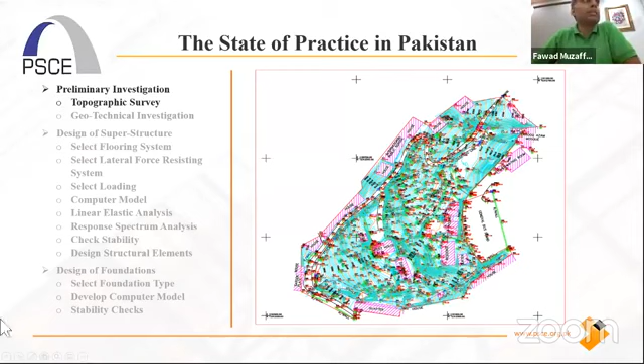So let me start with the state of practice in Pakistan. Typically once we start a project, we have the topographic survey done, so we have a fair bit of idea as to what the landscape looks like, followed by geotechnical investigation, which typically involves execution of a number of boreholes and the SPTs and different types of soil and water tests that are done on the soil.

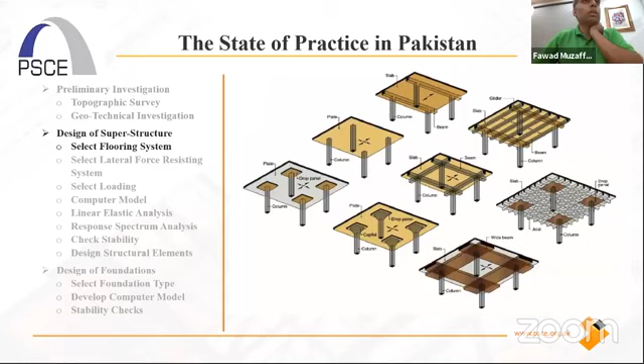After that, typically the structural engineer would select a flooring system, which is most often in urban areas a flat slab or a flat plate, or a beam slab system. Rarely, for larger spans, we go for waffle or other systems. After that, the structural engineer selects the lateral force resisting system.

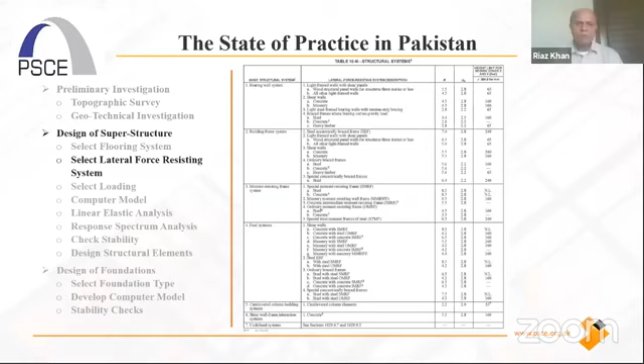Two of these lateral force resisting systems are very common. The first one is the dual system that everyone seems to use, and the second one is the special moment resisting frame system or the intermediate moment resisting frame systems. Very rarely do people use other systems, except maybe bearing wall systems in some cases, where you would like to have just the walls of the building support the lateral force that is to be imposed on the building.

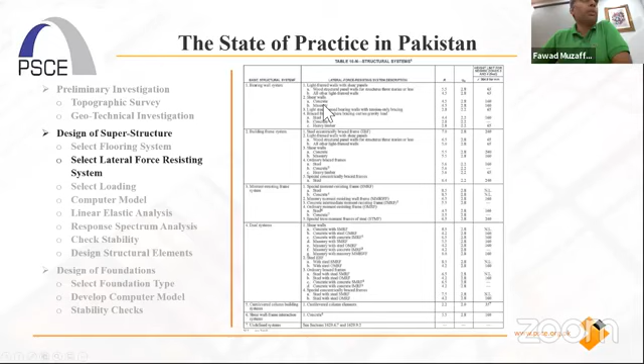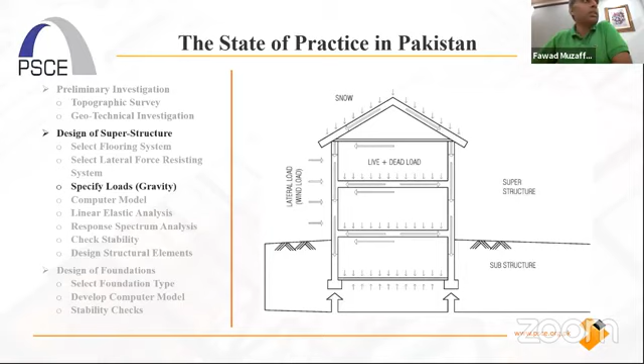After that, the structural engineer comes and selects the live and dead loads. People use UBC 97, some people use ASCE 7-16 because UBC 97 does not contain that list of different types of gravity loads that is there in ASCE 7-16 or ASCE 7-10 or earlier ASCE versions.

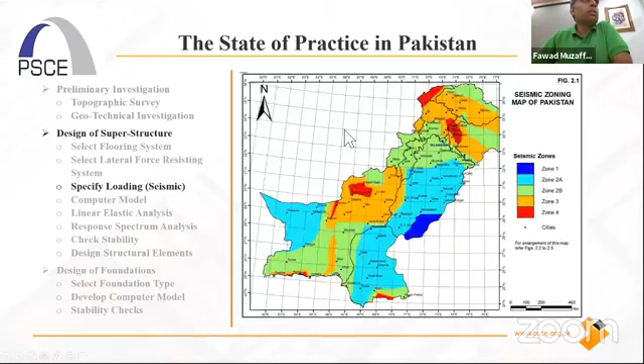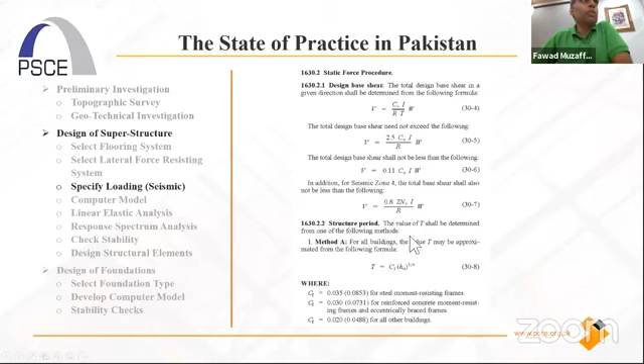After that, as far as the seismic loads are concerned, you just have this zonation done in the UBC 97, or what we call the Pakistan Building Code, and from this we pick a particular zone. Basically, what we are doing is assuming that a certain PGA is associated with each of these zones, and then we build the response spectrum accordingly. After that, the base shear is calculated from the standard formula: V equals CV over T, I over R, into W. These are the same coefficients that are used to construct the response spectrum, and at the end of the day, a response spectrum is constructed for the seismic load of the building.

The structural engineer also looks into the different types of irregularities that might be there, the vertical irregularity and the structural irregularities.

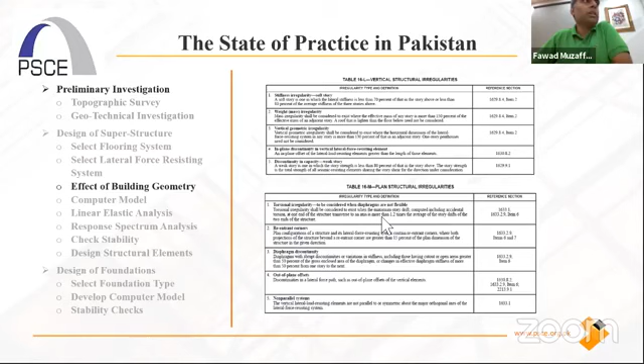Everyone knows how to use an ETABS model, right? Even people who have just graduated out of college know how to make an ETABS model. A linear elastic analysis is then carried out using the ETABS model.

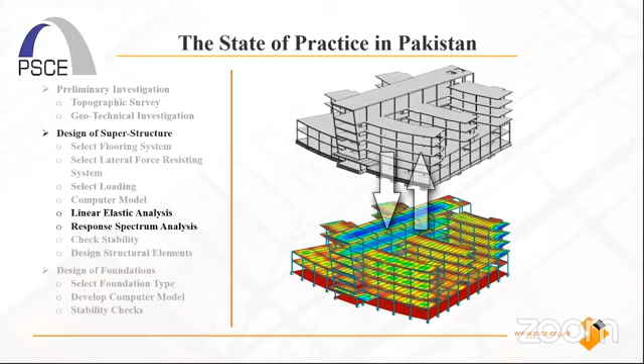Based on the force demands from the linear elastic structural analysis...

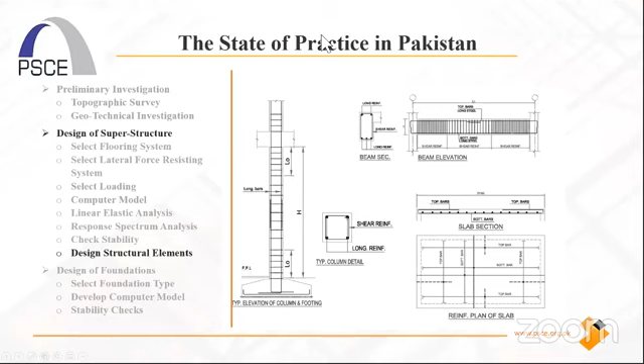So after, based on it, the structural engineer goes on and carries out the structural design. After that, the foundation of the structure is designed, and a separate computer model is typically built to design the foundation of the building.

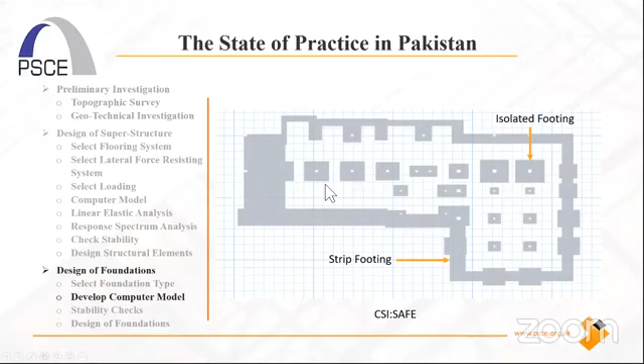Now this is very important, because a separate computer model, SAFE or another software, is constructed out of it. I'll come back to it later, but this is very important because what you are doing is constructing two different models which do not have deformation compatibility with each other.

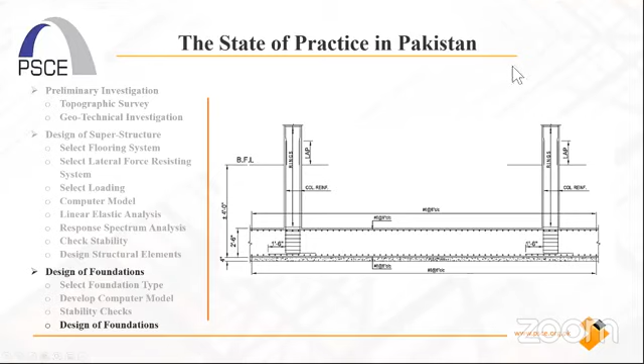And lastly, the foundations are designed based on the analysis of the model and the calculations of the structural engineer. So this is what everyone knows how to do in Pakistan. This is very typical. This is not rocket science. Everyone knows how to do it.

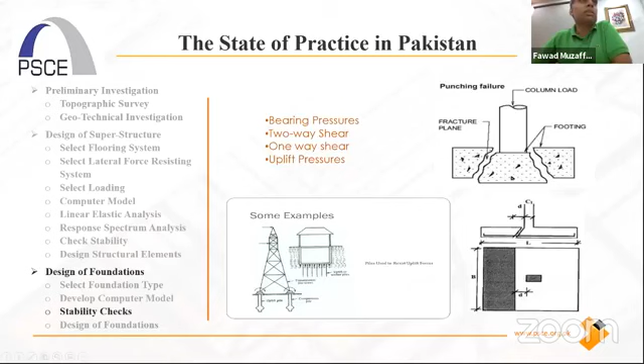But let me take you guys gradually towards whatever is happening internationally. So I'll start off with seismic hazard characterization - that response spectrum that everyone tends to use. What is the background of it? From where did it come from? And the answer is seismic hazard characterization. What do we mean by that? Well...

And every time there's an earthquake, all of those instruments record the acceleration ground history of the event. Now, over a passage of time, over decades, they have been able to accumulate a lot of these ground motion acceleration histories. So from these ground motion acceleration histories, they have empirically calibrated different ground motion parameters. So now what are the ground motion parameters?

The ground motion parameters can be the peak acceleration of the ground, which is called PGA - most commonly known by everyone. It can be PGD, peak ground displacement, or PGV, peak ground velocity. But by far, the most common ground motion parameter that interests everyone is the PGA, the peak ground acceleration.

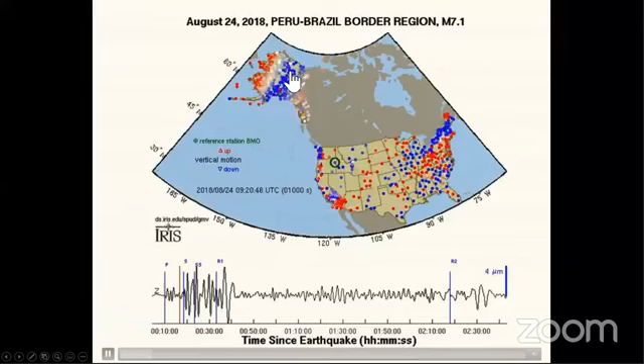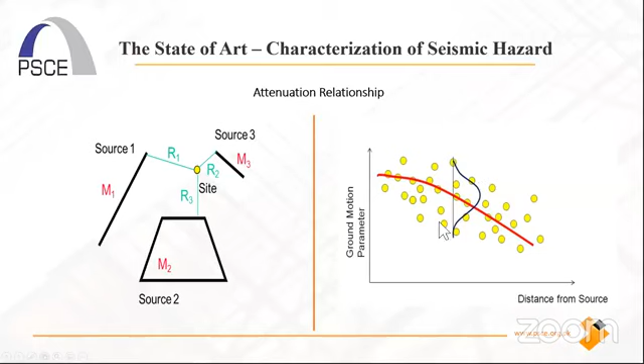Okay, so for each one of those events, each one of those stations where the ground motion history is recorded, they plotted all of the scatter, fitted a mean to it, and then calculated what the distribution around that mean for a certain distance is. And it came out to be a normal distribution.

Now there are two types of seismic hazard analysis.

The original seismic hazard analysis used in the 1960s and 70s was deterministic seismic hazard analysis. Basically, if you have a site, you can have multiple sources of hazard around it. Those sources can be point sources, like volcanoes, line sources, meaning faults, or area sources, where we do not have a well-defined source of the earthquake, but it's assumed to be spread around a certain area.

Remember those attenuation relationships gave you the ground motion parameter as a function of distance from the source. So if we have a site with source 1, source 2, and source 3 around it, we can determine the minimum distance from each source to the site, then plot those statistical means, the attenuation relationships, and get 3 curves for each of the sources.

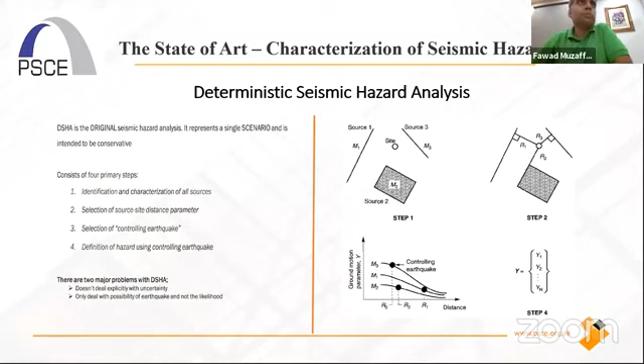Subsequently, they developed an approach called probabilistic seismic hazard analysis. This approach not only takes into account that an earthquake can happen anywhere within the source, and that the magnitude can be anywhere from 4 all the way up to 9 or maybe 10, but also that the intensity of ground motion at the site is not certain for a given magnitude and distance from the source, and furthermore, we do not know when the earthquake will occur. So probabilistic seismic hazard analysis takes into account all of these uncertainties, not just the worst case scenario.

As I told you before, there are different types of sources: point sources, line sources like faults, for example the Main Boundary Thrust in Pakistan, and area sources, where you have an area and you don't know exactly where the earthquake will occur, typically the case where fault lines are not well established. There are three types of sources that they discovered.

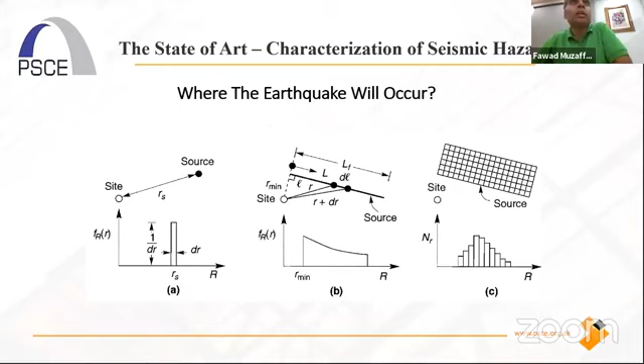I will not take you deeper into this because I don't think you guys will understand it. But basically, for a line source, it is equally likely that the earthquake will happen anywhere along the line, as you can see in figure B. And for an area source, they divided it into different grids and said it is equally likely that the earthquake will happen within one of those grids.

The next question was how big the earthquake will be. There are three types of laws that they used.

The slip dependent laws, which is basically applicable for sources that have a well-defined slip rate.

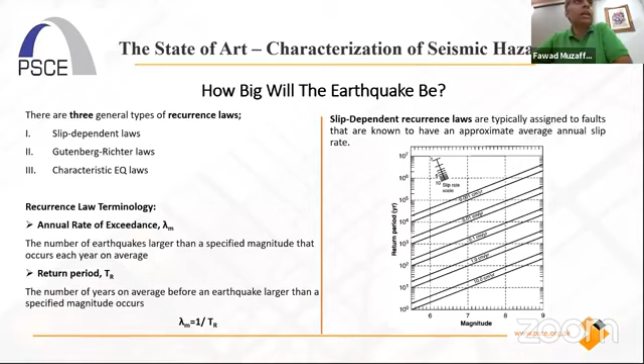The Gutenberg-Richter laws, which basically describe that the number of earthquakes occurring annually from a given source is a log linear function of magnitude.

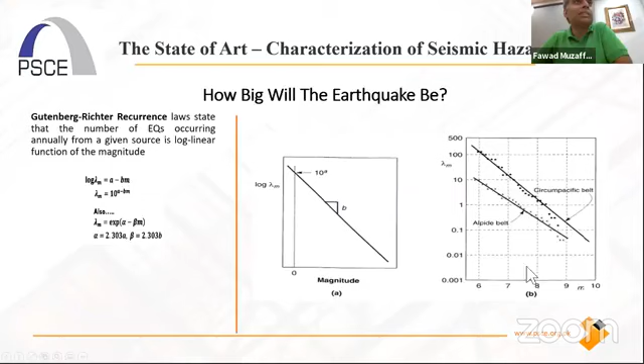And lastly, they realized that from a certain source, you cannot have earthquakes higher than a certain magnitude. This characteristic earthquake recurrence law is an adaptation of the previous Gutenberg-Richter recurrence law, with the taper off of the maximum line that you can see here, and this is typically taken from the geological data.

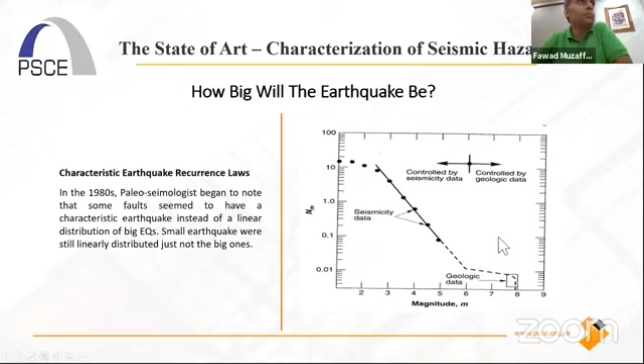And they did the temporal uncertainty by using the Poisson's model, which basically assumes that there is an equal likelihood of an earthquake happening within a certain magnitude, within a certain period of time, or for a certain unit time.

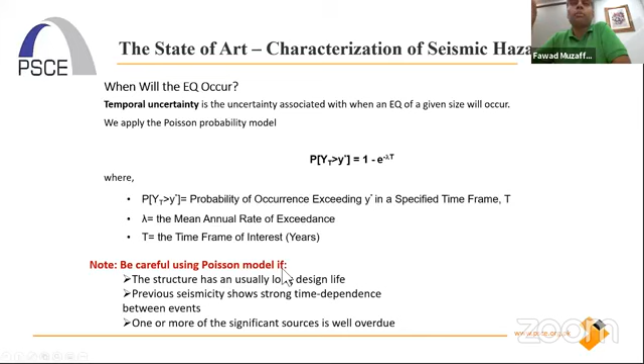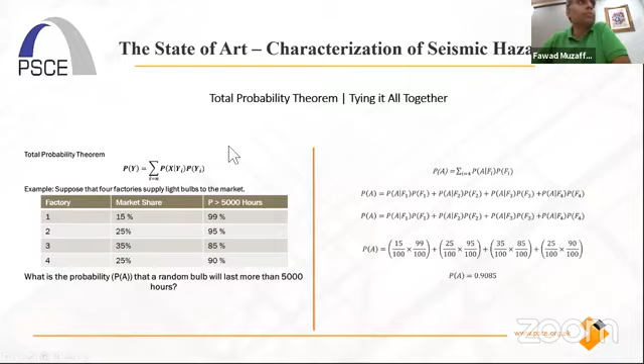Now, because all of those things were different probabilities, they stitched everything together using the total probability theorem, and came up with this big equation.

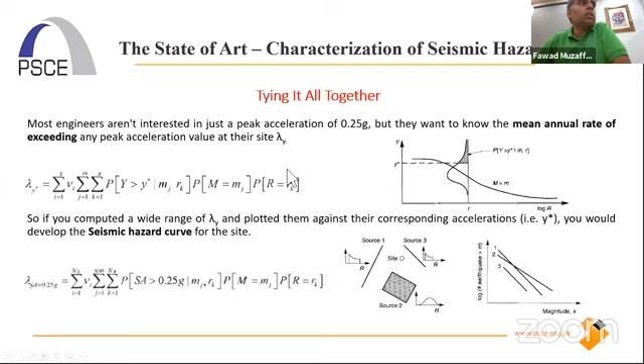So after doing all of the probabilistic stuff, and I won't take you deeper into it because I don't want to lose your attention, they developed a seismic hazard curve, the solid black curve that you see on the top there.

Basically what that curve gives you is the annual frequency of exceedance, or in other words, a relationship between the probability of a certain magnitude of earthquake happening per year with the PGA. So if the x-axis is the peak ground acceleration, the y-axis is the annual frequency of exceedance, right?

So annual frequency of exceedance is basically the mean number of expected earthquakes of a certain magnitude that we expect to happen in a particular year.

So from this seismic hazard curve, what they generated was the uniform hazard curve. What is the uniform hazard curve, and how did they do it? Basically...

What we are interested in is, for example, what is the uniform hazard curve for an event that we expect to happen every 50 years, for example, right? So we would have this horizontal line here, and from that horizontal line, we can have these different intercepts with the time period of the oscillators for the different ground motions.

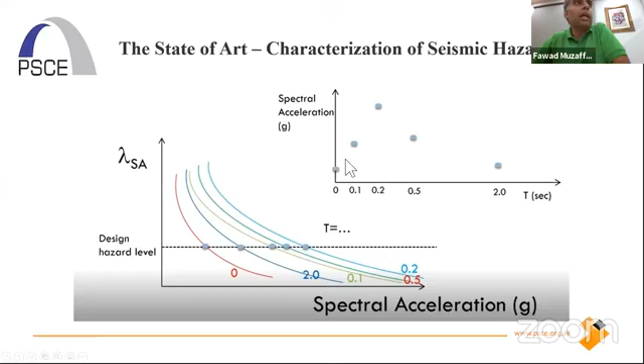And then from these intercepts, we can read the spectral acceleration and similarly plot those spectral accelerations as a function of the time period of the oscillators. And if we do that, we get something like this. Now this is too much for you guys, but I just wanted to give you a flavor.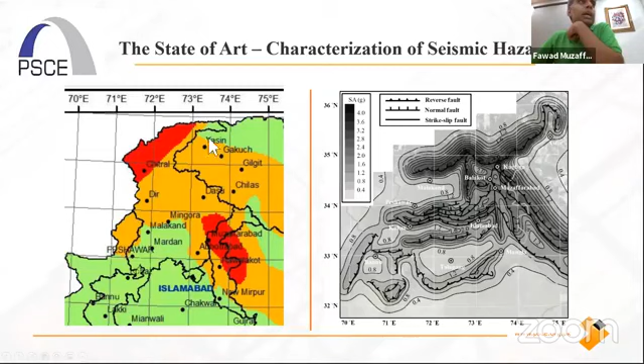Okay, so similarly, sometimes they draw these contours, other times they have these fancy colors on the left. This exercise has been done for the whole world, and you can download these maps from the Global Seismic Hazard Assessment Program website, and they have done it for different return periods.

What I mean is this map will change for different return periods. So this one is for, I think, 2,475 years, which is the MCER level for the UBC 97.

Just a quick overview of the tectonic setting of Pakistan. All of the faults going from northeast to southwest are strike slip faults, and in general, all of the faults perpendicular to it are reverse faults or thrust faults.

You can see that the fault on the left is basically the Chaman fault here. This is the Salt Range fault and the Kalabagh fault, and then you see the main boundary thrust arcing from southeast, like this. I don't know if you can see my cursor, but basically what I'm talking about is fault number 3, if you can see the screen also.

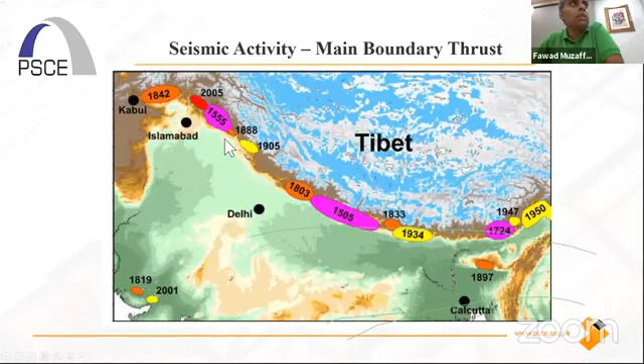So we have one in Kabul in 1842. The 2005 earthquake is also marked here. But the next big one should be northeast of Islamabad or northwest of Islamabad, and it's due.

So with all of this background, I'm sure most of you will be bored. There's a lot of science, a lot of seismology that has gone into it.

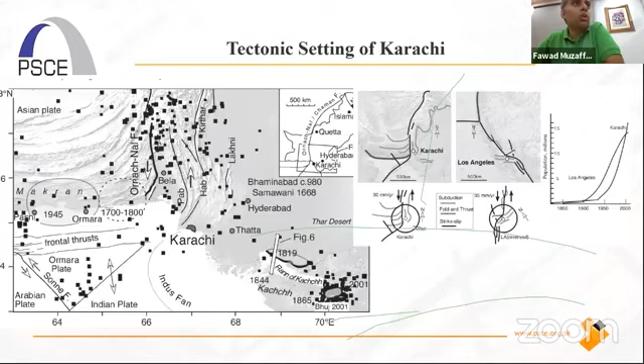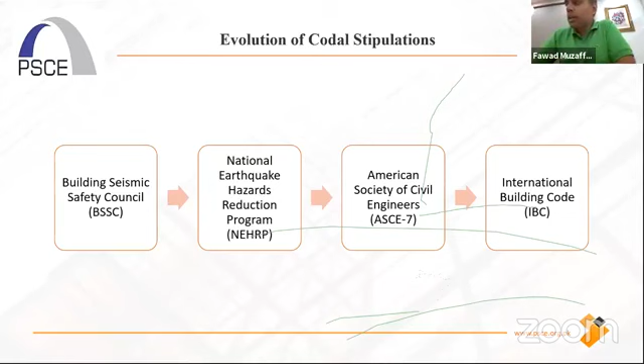What they have is a Building Seismic Safety Council, where a lot of experts meet and talk about important problems facing the construction industry. They identify the key problems and the research behind it and send it to NEHRP, the National Earthquake Hazards Reduction Program. NEHRP then further discusses those recommendations and the research, and then stipulates the Codal provisions. NEHRP then sends it to the American Society of Civil Engineers, which adopts those after review. After the provisions have been adopted in ASCE, they send it to the IBC, which then reviews and adopts it. This is basically the hierarchy of different Codal stipulations.

Now, if you open ASCE 7-16, you will see contour maps like the ones that I showed you a few slides back. Now you know where these contour maps come from, right? It comes from probabilistic seismic hazard analysis and all that probabilistic stuff. So the first thing an American engineer would do is locate his structure on the map and read values of SS and S1, which are spectral accelerations at 0.2 seconds and 1 second.

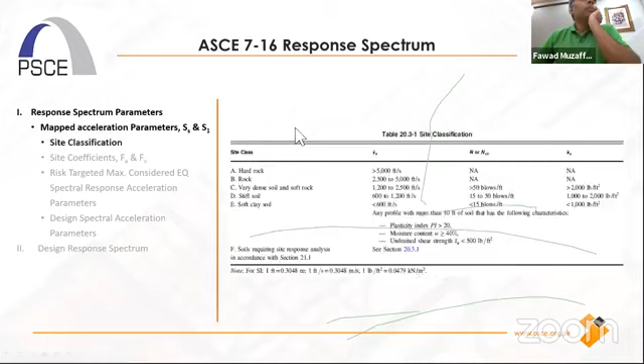After that, the engineer goes in and uses either the crosshole survey or the SPT blow counts to classify his soil at the site. This is similar to what we do in UBC 97, right? But then he adopts these FA and FV coefficients.

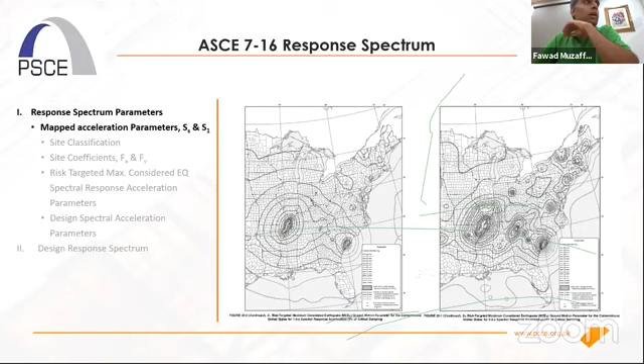Basically, what these coefficients are: the ground motions we discussed, the spectral accelerations that I showed you — let me take you back — the spectral accelerations mapped here in ASCE 7-16 are accelerations of the rock. Typically there's a lot of soil on top of the rock, and that soil can either amplify or de-amplify those accelerations. So FA and FV are basically coefficients that take into account those variations.

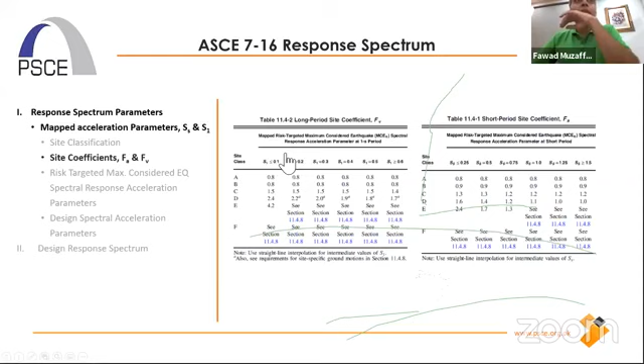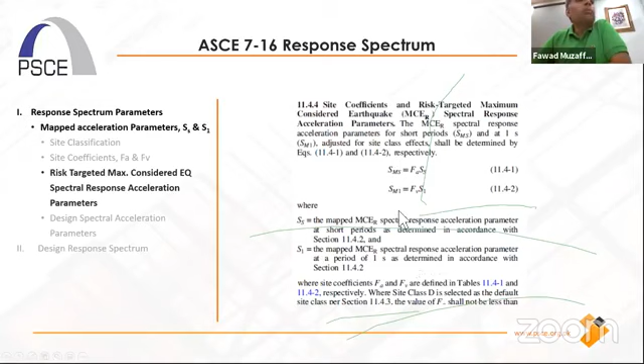Another way to put it, without getting into the simulation, is that the engineer then calculates SMS and SM1 by multiplying the FA and FV coefficients with the SS and S1 that are mapped in ASCE 7-16. From those SMS and SM1 values, the engineer calculates SD1 and SDS by simply scaling with a fudge factor of 2/3. This fudge factor doesn't have much science to it, because it's a fudge factor.

Because what they ended up with in ASCE 7-16 is that the ground motions were a lot higher compared to what they were using previously, and they didn't want to change all the buildings or outdate all of them. So they figured out that a factor of 2/3 should be sufficient to make it compatible with the previous codes, and that's where this fudge factor comes from.

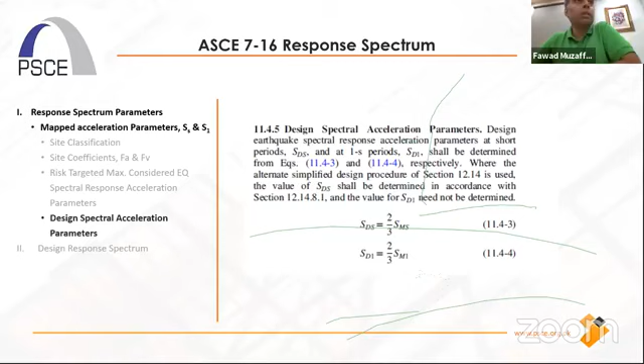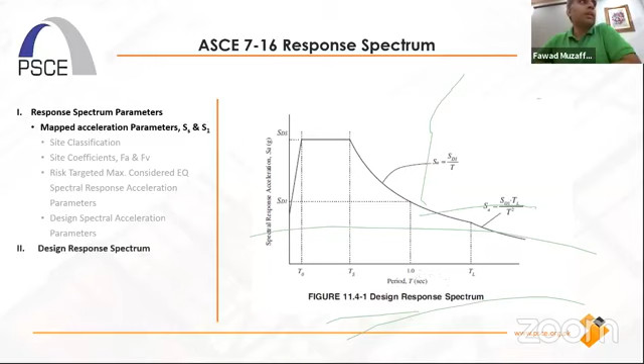After that, the engineer constructs the response spectrum. So the overall process is the same, right? But there are marked differences between ASCE 7-16 and UBC 97. First of all, the prescribed lateral force resisting systems have expanded a lot.

So in UBC 97, you would have only a few types of bearing wall systems, but in ASCE 7-16, you have a lot of them. Similarly is the case with building frame systems. You have a lot more of these building frame systems as compared to the systems in UBC 97. But something new is also included.

I mean, most of us are accustomed to using dual systems. And in dual systems, if you open up UBC 97, you would not be able to use a special. There's no prescription of value of R for special moment resisting frame, special shear wall with intermediate moment resisting frame. So if you open UBC 97, you don't have that system.

But here they have included the dual system with intermediate moment frames capable of resisting at least 25% of prescribed shear force, and they have coupled it up with special reinforced concrete shear walls, as you can see in paragraph E2. So there are a lot of new building frame systems.

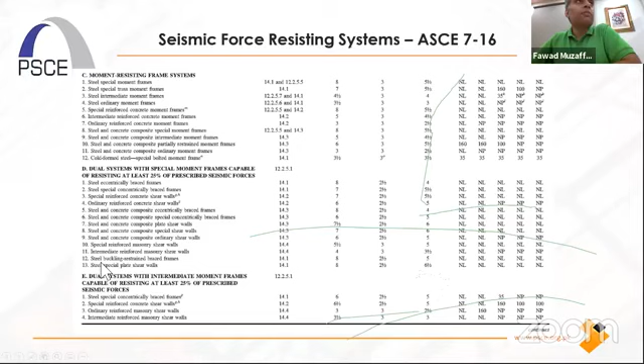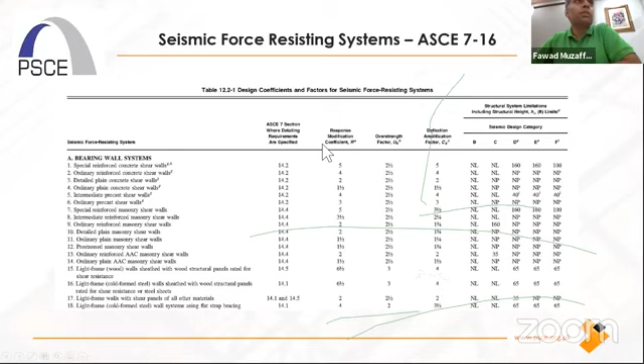Secondly, one other big difference that we have is this coefficient, deflection amplification factor CD. So in UBC 97, you are told that an overstrength factor or response modification coefficient R is given, and we are told that to convert an elastic deformation into an inelastic deformation when it comes to drift, we just have to multiply it with 0.7 R, and it's a fudge factor. But here they have included deflection amplification factor separately and response modification coefficient or overstrength factor R separately. So these two are now decoupled in the new codes.

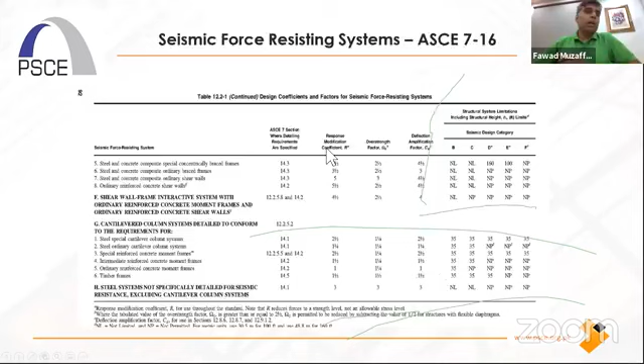One of the key differences, and the world has moved on: if you use UBC 97 to design a building, there is a 10% probability that your ground motion will be exceeded in the next 50 years. Now this is unacceptable by international standards, whereas in ASCE 7-16, even in the IBC code, now there's a 2%, they have ramped up the ground motions. So now there is a 2% probability that your ground motion will be exceeded in the next 50 years, which is a lot less as compared to 10% probability of exceedance.

Now, this has a lot of repercussions. All of the buildings that you're designing in Pakistan are basically obsolete as far as the new standards are concerned.

See, I was talking to you about how to calculate the maximum inelastic response displacement. On the left side, you see UBC specifies 0.7 R delta S. And to calculate delta S, UBC tells you that you should use the base shear that you use to calculate force effects. Correct me if I'm wrong, but this is what I understand from UBC 97. On the other hand, in ASCE 7-16, they give you this CD factor in the tables, and this delta max is basically analogous to this delta S, the interstory drift that you get from your linear elastic analysis.

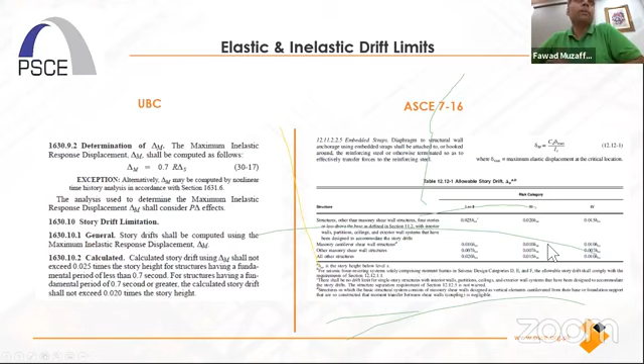So it is based on risk category of the building. It's no longer independent of the risk category of the building. So for risk category 4, for example, it is 0.015, whereas if you have a building whose time period is less than 0.7 second, it is 0.025. So in certain cases, the interstory drift is much more stricter as compared to that of UBC 97.

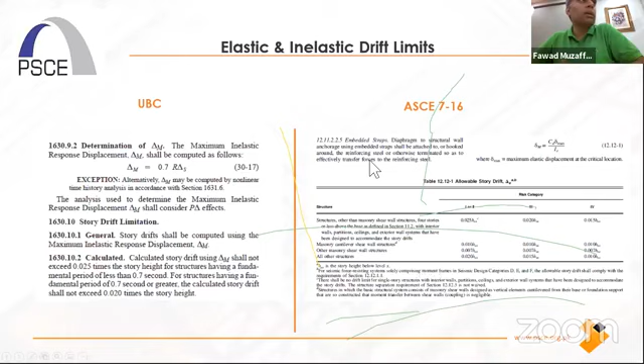Although this equation 12.12-1, which uses the CD factor, is much more relaxed as compared to the previous case.

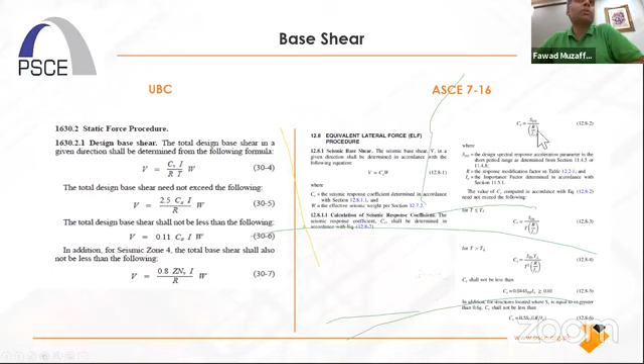Then equation 30-4 on the left side is used to calculate the base shear, whereas they have changed the equation in the new codes. Previously it was V equal to CV over T, I over R into W, whereas in this code it is V equal to CS W. And CS basically is calculated using a bunch of these equations.

Importance factor. In UBC 97, the importance factor is basically related to the type of occupancy of the building. So for essential facilities, the seismic importance factor will be 1.25. For hazardous buildings it is 1.25, and for special occupancy structures it is 1.

On the other hand, in ASCE 7-16, the importance factor is related to the risk category of the building. Now what is the risk category of the building? It is basically dependent on the number of persons whose life will be at risk if the building collapses.

Now, this is not the number of persons who will die because of the collapse of the building. These are the number of persons whose life can be affected.

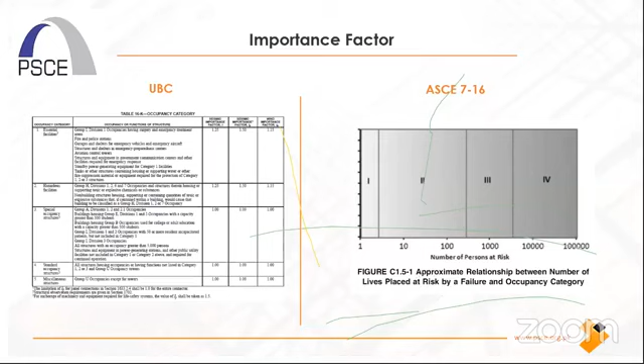For example, if you consider a hospital, it might be housing 50, 60, or maybe 100 people. But all the people that the hospital is serving is basically also counted towards the number of people who will be affected if the hospital collapses.

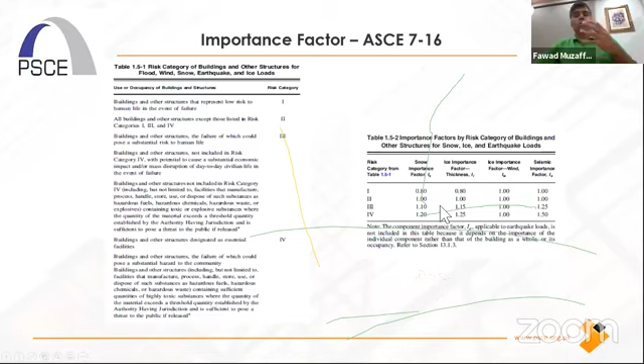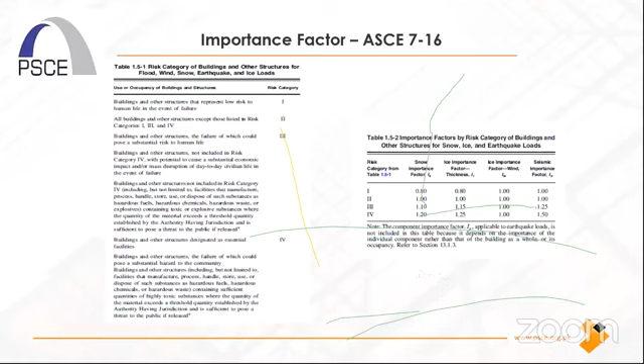Now, from this chart, if you look at the table on the right side, we figure out the risk category of the building, and the importance factor changes as per the risk category. So the importance factor is no longer solely dependent on the occupancy or intended use of the building. It is a function of the number of people whose life will be affected, and this is a very big change.

Now in UBC 97, to calculate the fundamental time period, you use T equals CT times H raised to 3 over 4. Or you can use Method B, which basically tells you that you can ramp up this time period with a factor of 1.4.

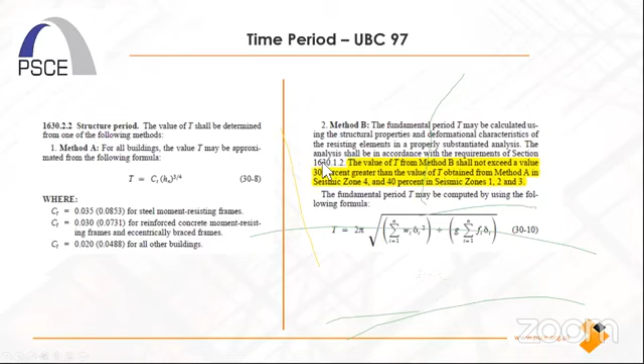In ASCE 7-16, in the last decade or so, what they have realized is that the time period is basically overestimated. In most cases, if you are using your finite element software to calculate the first mode and fundamental time period, it will overestimate the time period, and that will result in reduction of your base shear. So basically what they have done is they have prescribed to use this equation T equals CT times hn raised to x, but they have limited the upper bound.

They put a cap on the time period, and what they've said is limit this time period that you obtain from equation 12.8-7 by using this coefficient CU, obtained from table 12.8-1, and there is a plot that they provide in the commentary section.

Basically, each point on this plot is the time period from analysis of the structure versus the actual time period. You see that the black lines in this plot are the predictions, the upper bound and lower bound cap of the time period of the structure. So they have put much stricter restriction on the upper bound of the time period as compared to previous codes.

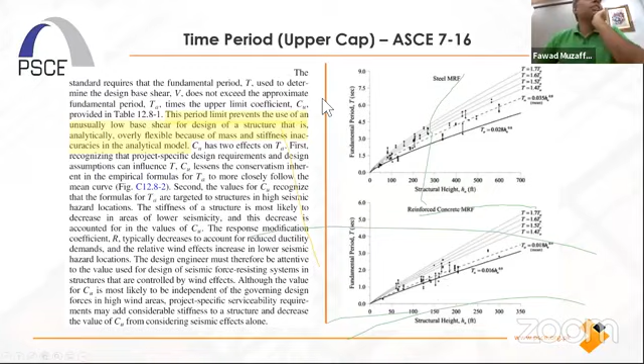So with these major differences between ASCE 7-16 and UBC 97, I'd like to take you back to whether, if you're using the building code of Pakistan to design a building, it is no longer safe. The first evidence I'll point you towards is that the building code of Pakistan is based on UBC 97. In UBC 97, for Pakistan, Islamabad, Karachi, and Peshawar are zone 4, whereas Lahore is zone 2A. On the other hand, in the building code of Pakistan, Karachi is zone 2B and Islamabad is zone 2B. So if you are designing something in Islamabad based on building code of Pakistan, you're grossly underestimating the seismic hazard.

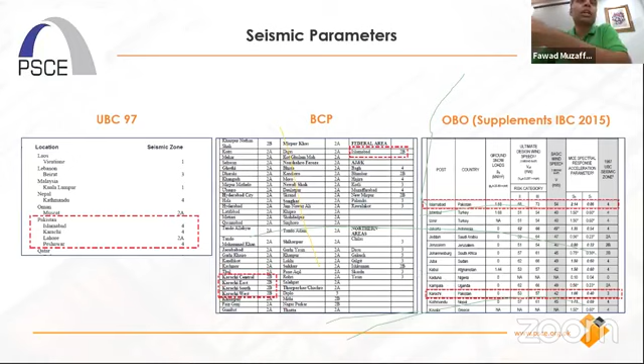Even in the OBO supplement IBC 2015, which is an American supplemental code, you can see that they have put Islamabad in zone 4 and Karachi in zone 3. So it is by no means a one-off that UBC 97 overestimated this. They consistently show that Karachi and Islamabad are much higher seismic zones compared to the building code of Pakistan.

The next evidence I present to you is, I started to take a look at it for Lahore, and there is an Indian code developed using probabilistic seismic hazard analysis. I thought it would be very interesting to compare the PGAs of, for example, Lahore and Amritsar, because both regions are located adjacent to each other, and the seismic hazard should be the same.

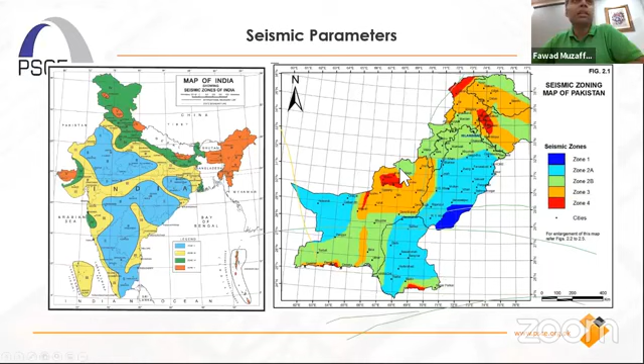On the left side, you see the seismic zonation of India. On the right side, you see the seismic zonation of Pakistan as contained in the building code of Pakistan. These are some more slides from the Indian code, which you probably cannot download because they have blocked every IP from that goes from Pakistan.

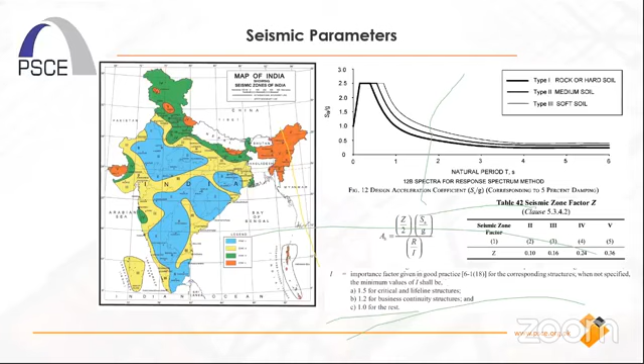Then these are more slides. They have specified R factors for the different structures, the Indian codes.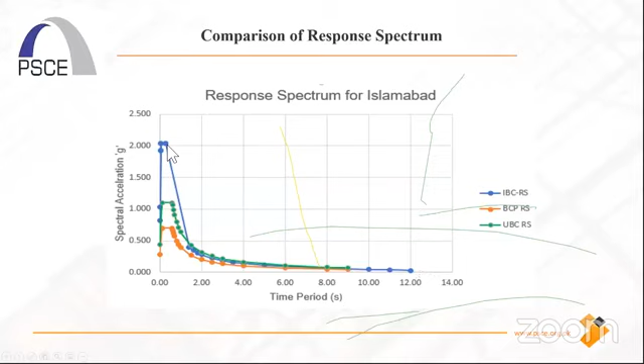You can see that the Pakistan building code response spectrum is nowhere near the UBC response spectrum or the 2015 IBC code response spectrum in blue. It is grossly underestimated. It grossly underestimates the seismic hazard of Islamabad.

Now, I think that it is very different, even at higher natural time periods.

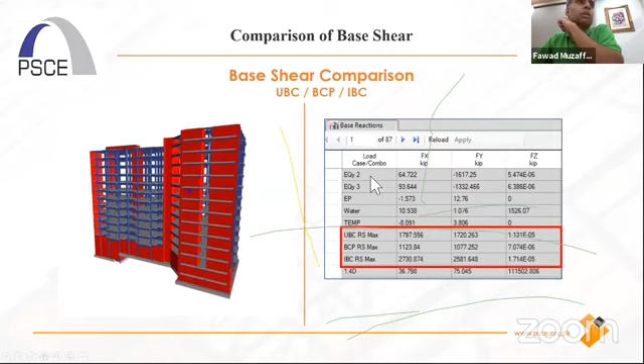The base shears, as per the three codes, we computed it for one of the buildings that we were doing. The UBC base shear is approximately 1.5, 1.6 times the building code of Pakistan base shear, and the IBC base shear is even more than the UBC base shear.

And lastly, I think, because I've covered a lot of stuff and I'm pretty much out of energy here. Most of us who are practicing structural engineering resort to response spectrum analysis, right, to calculate interstory drifts.

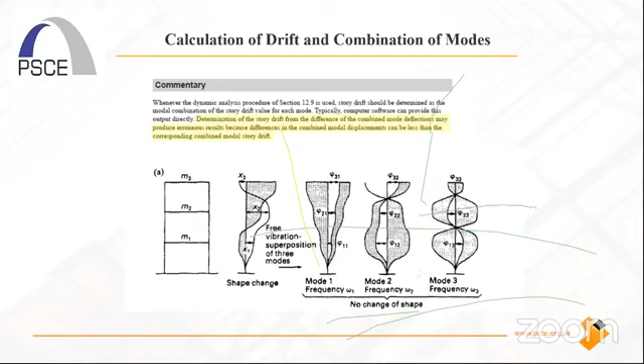But what you don't realize is that if you carry out response spectrum analysis, you lose directionality. So I've taken this page out of Ghosh's book, and basically what that is telling us is you don't know the shape of the modes when you are combining those modes to get the final deflected shape. The modes can be opposing each other, the modes can be complementing each other, but we don't know that because the inherent nature of response spectrum analysis is that we lose directionality.

So you should be careful as to what you look at using ETABS. Whereas ETABS does this, ETABS basically takes all of the modes and calculates the response spectrum based on one direction and another direction, and then gives you the critical value.

But if you are using another software, you should be aware of this fact, that you should not be able to mix different response spectrum, the different modes, that are out of phase with each other, and erroneously predict an interstory drift.

All right, so I don't think I'll take you to the ground motion selection, maybe next year, but not this year, definitely. So I just wanted to present to you different things that we have arbitrarily realized in our design practice, and we take those things into account.

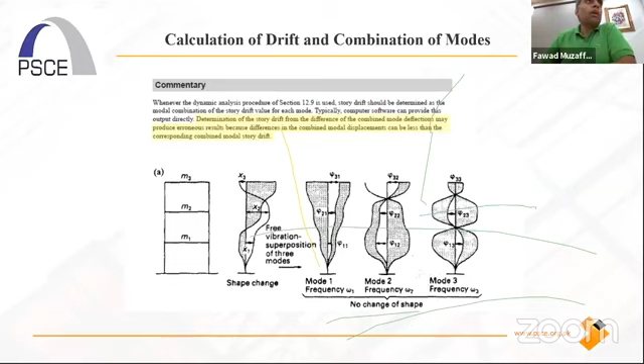One of those things is basically seismic hazard, how we deal with it. The other thing is we use modern codes. We no longer use UBC 97. We tend to use ASCE 7-16 more and more. We are cognizant of the fact that the seismic zonation of Pakistan is not ideally done. It should be dealt with more thoroughly and all that.

So with this, I think I'll open the floor for questions. I understand I went through a lot of stuff. I've spent last night, probably I slept at 2, so I'm pretty much out of energy. And if you guys want to have an interactive session, fine. If you have any questions, I'll open the floor.

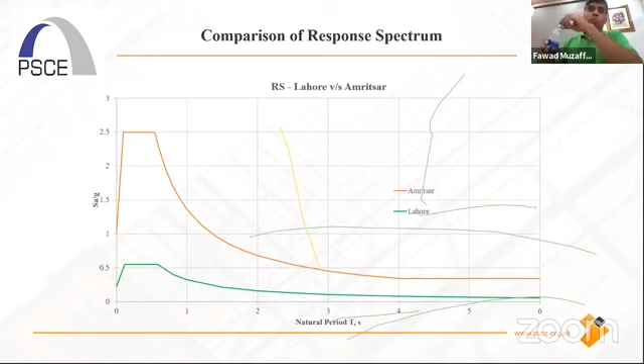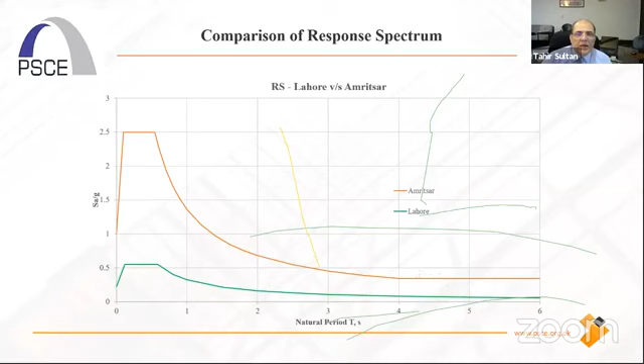Dr. Saab, there are some questions, and I'm going to read out those questions for you. Sure, can you hear me? Yes, I can, sure, sir. The first question is from Mr. Furqan Hamid. He is asking, is relationship with depth of seismic source to site analyzed too? Which earthquake magnitude will be taken into consideration, qualitative or quantitative, for building design?

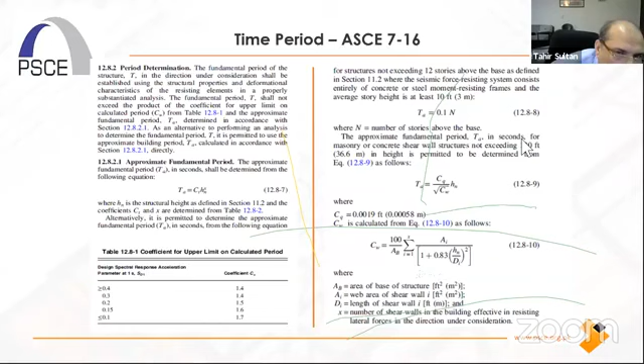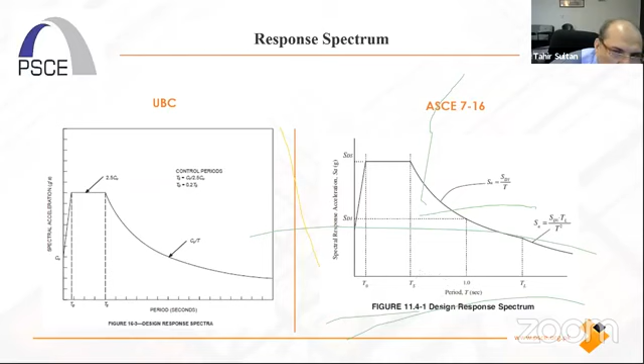Whatever I heard, he's asking if the depth of the seismic source is also a factor in attenuation functions. I'll read the question again: is a relationship with depth of seismic source to site analyzed? And second, which earthquake magnitude will be taken into consideration, qualitative or quantitative, for building design?

The answer to the first question is what he's pointing towards is hypocenter and epicenter. Yes, we use hypocenter, which is basically the location of the earthquake at that point, while the epicenter is the projection of the source of the earthquake to the surface. So the short answer is we do take into account the depth of the event.

when we are analyzing or developing the attenuation functions. The answer to the second question is, I don't understand what he means by qualitative and quantitative, but we do consider the magnitude of the earthquake in the probabilistic framework I've just discussed. We consider different magnitudes of earthquakes, and typically those magnitudes are very discrete points, not continuous. Objectively there are a few points we consider which are available from historical data. We don't have data spanning millions of years in the past, so we don't have continuous curves, but we have discrete data that we use.

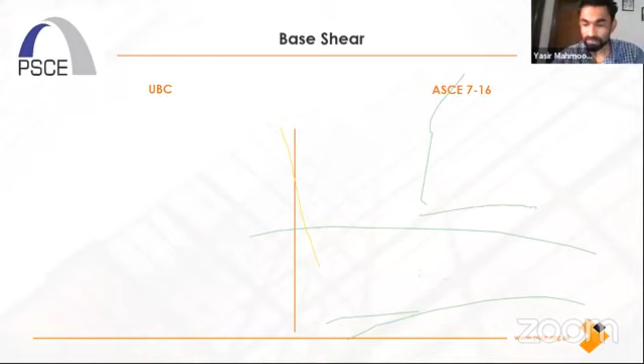You have mentioned two factors, FA and FV, right? Do these factors relate to the far field and the near field earthquake? No, they relate to the stiffness of the soil on which the building rests.

Okay, thank you so much. Thank you. Thank you very much. So we have now questions on the text, Dr. Saab. This is from Manal.

The question is, are plinth beams necessary to provide at ground level? Is there any compulsion given in any seismic code to provide plinth beams? If no plinth beams, then should we have to tie the footings or isolate footings? Can we also use no tie at plinth level and footing level? I hope you have understood, there is something wrong with the grammar.

No, I understand that completely. Yes, it is a requirement of the building codes. I don't remember the exact provision right now, but I'm sure it is an IBC requirement to tie all of the independent foundations by using beams or tie beams or something. So you have to do it for earthquake-prone regions, and I don't know of any building that we did without it, so yes, you have to do it, as per I think IBC or UBC condition. I don't remember the exact provision, I can get back to you on that one.

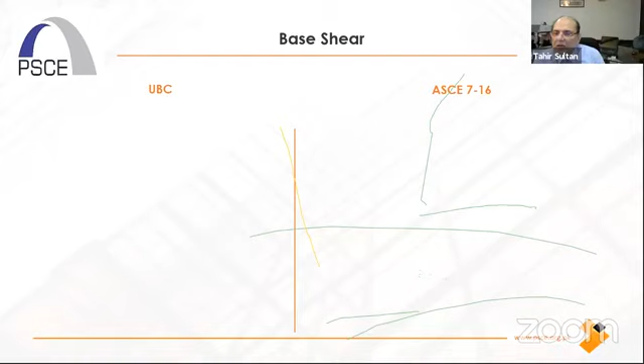Right, now this is again a question from Manal. Modeling foundation in ETABS together with the building in the model, is it better, or is separate foundation modeling safe? I think you want to speak about this, in the beginning I talked about it very briefly. I'm mostly out of energy today, so I talked about it very briefly at the start of the lecture.

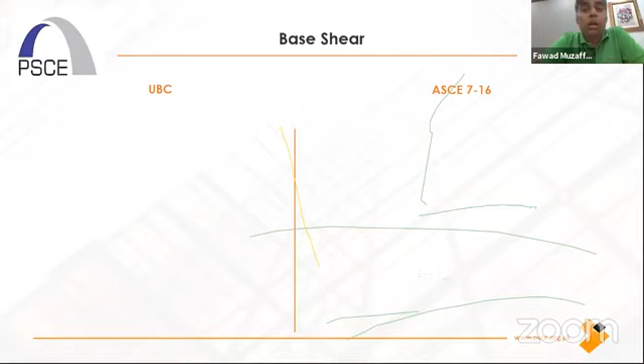Most of these young structural engineers, when I see their structures done, they separate the finite element model of the foundation from the finite element model of the superstructure, and that is wrong. The reason why it's wrong is because if you use fixed supports to model the base of the building, you're basically saying that none of your foundations will deflect. Then you are calculating all the forces in the basement floor or first floor above the supports, which might be very different if you have a flexible raft.

I had a very literal conversation about this with a few of our experts. We can have flexible rafts. If you have a flexible raft or other flexible foundation systems, the distribution of forces in the floor above the foundations can be significantly different as compared to if you have them fixed or pinned.

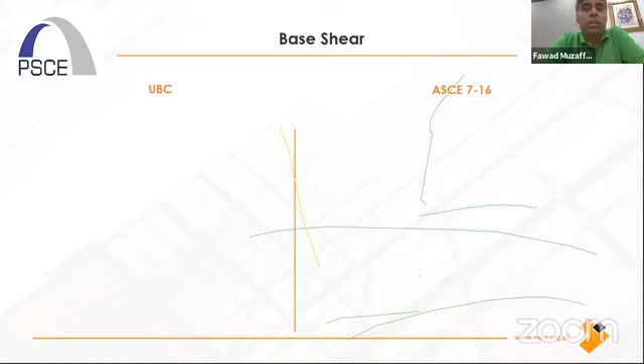So please don't make this mistake. Model the foundation with the superstructure so that you can take into account the effect of variable deformations of the different supports in the superstructure. You cannot isolate the two models and then claim that your force distribution or force redistribution in the superstructure is as per your deflections in the foundation.

We have another question, this one from Ilyas Niazi. He's asking, does ASCE 7-16 allow you to model the superstructure separately?

I don't think so. First of all, ASCE 7-16 is written for different audiences. Some of those audiences are very starting-level audiences, a structural engineer who's just starting to design—ASCE 7-16 is written for that. And ASCE 7-16 is also written for very high-end professionals where you can engage in soil structure interaction and the effect of soil on ground motion amplification and all that. So the answer is no, I don't think so. How can you? I don't agree that ASCE 7-16 allows that. I know Ilyas very well, so we can have a conversation about that later.